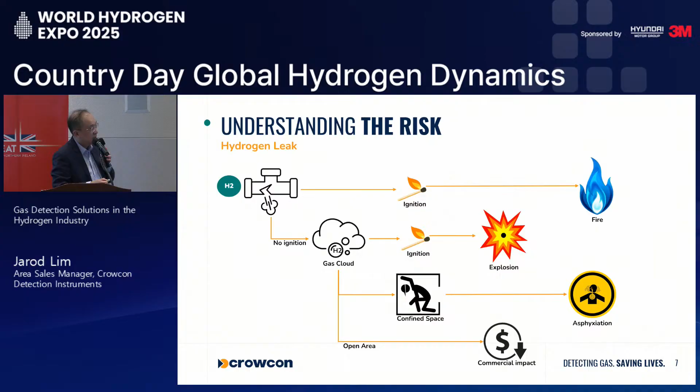So look at this ignition scenario - a typical gas hydrogen leak. In a typical situation like this, we have a hydrogen leakage. With ignition, you get a fire started. When there's no ignition and you have a gas cloud, that ignition will result in an explosion. In a confined space, as mentioned, you get asphyxiation, and in an open area with an explosion, you typically have unfortunate incidents where people have passed on and also destruction of property. So this is the kind of understanding of the risk that we face.

In terms of safety aspects, hydrogen is a light gas with less radiant heat, so you don't feel the heat unless you're close to it. And because there's no smoke, you need a lot of detection ready to be able to detect it. There's a lot of misconception about hydrogen being more dangerous, but actually different risks exist in gasoline, natural gas, or other fuels. If we are able to manage the safety aspects, we can actually have a successful adoption in this space.

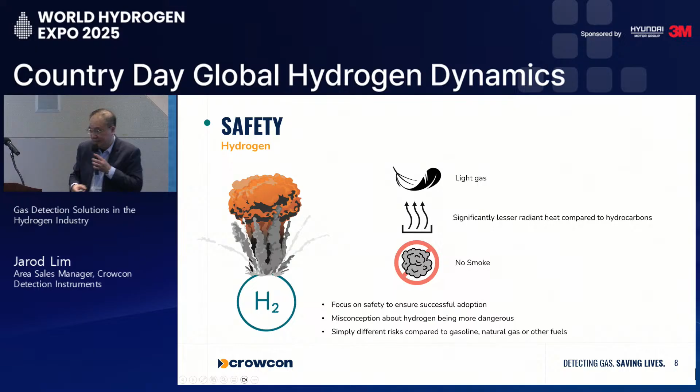This is a report from the Hydrogen Incidents and Accidents Database. You can see the space of reported incidents, with a high incidence of explosion at 56%, fire at 28%, unignited release at 13%, and near miss at only 3%. This tells you it's really a very dangerous situation, and you need to be wary.

In terms of reported causes, typically valve malfunction and leaking connections are the leading causes of hydrogen incidents. In 50% of these incidents, the report says that if staff were trained and educated better, they would be able to mitigate the risks. Corrective measures taken include better systems design and material selection.

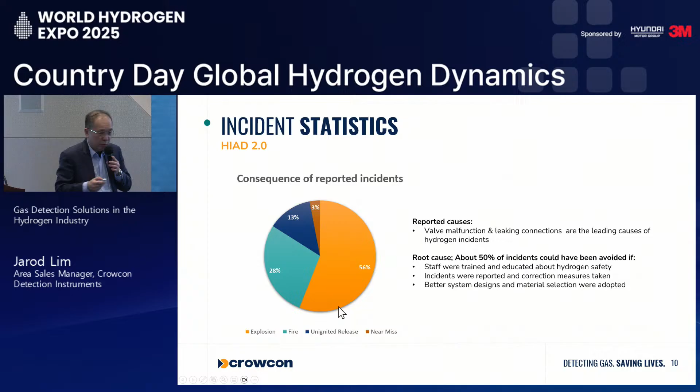So this is important as we go forward. There are safeguards that we have in place, and these are the broad scopes that we have. We'll go into the details about electrolyzers in a while.

If you look at hydrogen, there are two ways of doing it: prevention, so robust equipment design is very key, along with regular inspection and maintenance, and training and awareness of the staff.

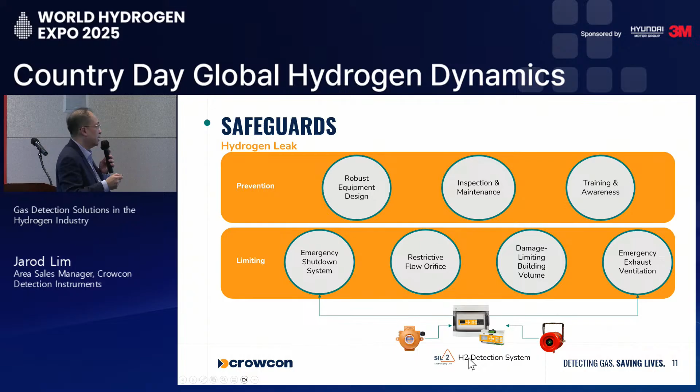In terms of limiting exposure, there's the emergency shutdown system, restrictive flow, damage limiting building volume, as well as emergency exhaust ventilation. I think other speakers will talk about this later. This typically comes under the H2 detection system, which I'll talk about in a short while.

In terms of detection technologies, these are the typical kinds of gas detectors deployed to mitigate risks in hydrogen. For personal protection, you have one you carry with your PPE, your personal protective equipment, which you put on your overalls, and this will detect hydrogen if it's within your vicinity. We also have fixed gas detectors and flame detectors able to detect hydrogen flames, and acoustic detectors for leaks from pressurized sources.

This is perhaps the key, which I'll talk about in a later slide: we can give a bespoke system so you can design it according to what you require, basically in the form of a gas sampling system that measures hydrogen concentration in process lines.

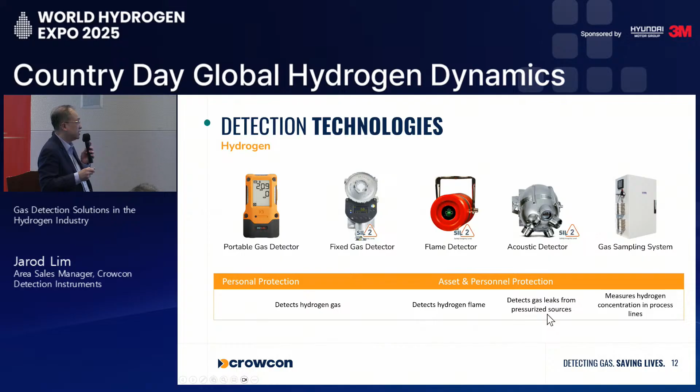Apart from the detectors you saw just now, within the detectors you have various kinds of sensing technology. I won't go through all of them, but these are the key sensing technologies deployed: catalytic, electrochemical, MOS, MEMS, thermal conductivity, and NDIR. But NDIR doesn't detect hydrogen. The rest have their own advantages and disadvantages.

So you need to understand your requirements, and we will work through with you in terms of what you need, then be able to advise which particular sensor goes into which sampling system.

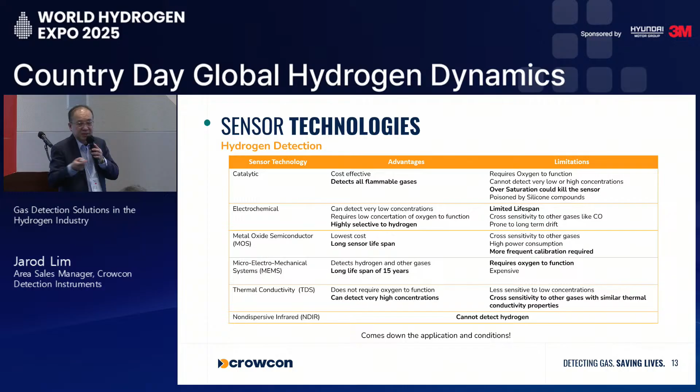In terms of applications, I think you've seen this around the exhibition, covering the whole hydrogen value chain. But we will focus in the next few slides on the electrolyzer and how we actually mitigate risk in this space, and show you some of the deployments we've done for storage and transportation applications.

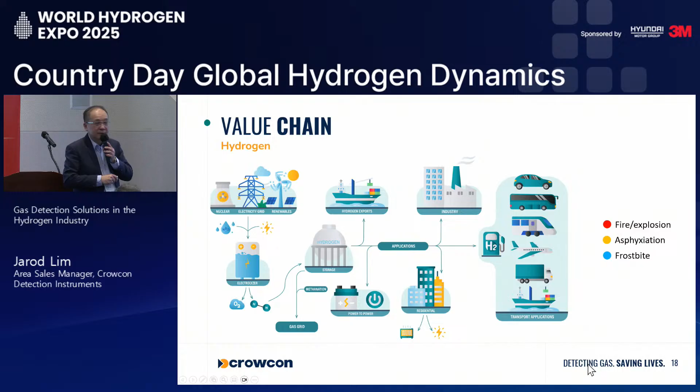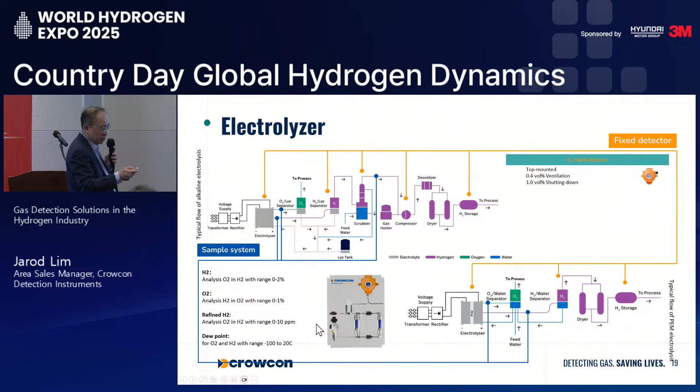So what happens here is that the sample analysis we just talked about, typically to detect H2 in O2, is installed at the oxygen outlet pipeline. Why do we do that? It's to detect whether hydrogen has leaked into the oxygen stream, and also to prevent the formation of explosive gas mixtures. Typically in the specs, we would use the electrochemical sensor or the thermal conductivity sensor, and these are able to detect at 1%, 2%, 4%, and also at volume 5,000 ppm.

And also for O2 in H2, in the earlier slide where you saw the electrolyzers, we installed it on the hydrogen outlet pipeline, downstream of the hydrogen purification units, to monitor the final product of hydrogen quality. We do this to detect whether oxygen has leaked into the hydrogen stream, for the safety and purity of the hydrogen, and also to prevent the formation of explosive gas mixtures. Here again, we deploy electrochemical sensors at a detection of 1%, 2%, and 4% volume.

And trace O2, this will be installed after hydrogen purification treatment, downstream of the hydrogen dryer and upstream of the storage tank or hydrogen processor. This is where I put it, at the final hydrogen outlet, to confirm the product purity. We do this to detect residual trace oxygen in hydrogen and to assess whether the membranes are actually damaged or aging. Once again, we deploy the electrochemical sensor at 0-10 or 100 ppm, parts per million.

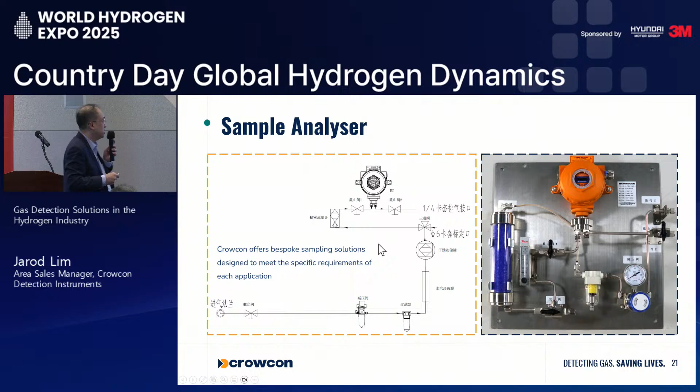This is a sample analyzer that we typically put inside the system. This is just one of the samples that we've done. We are able to design it according to your needs and also depending on what the requirements are. So do come and talk with us if you need to.

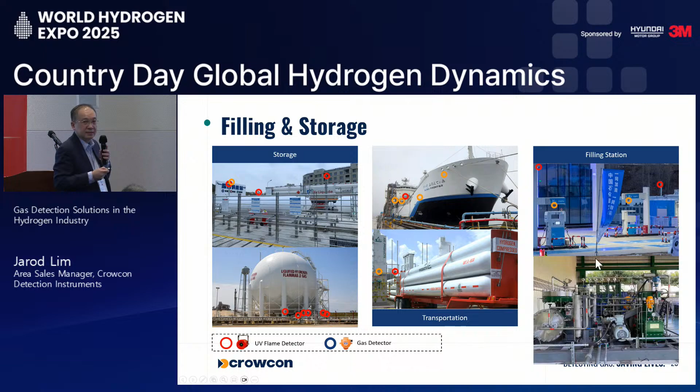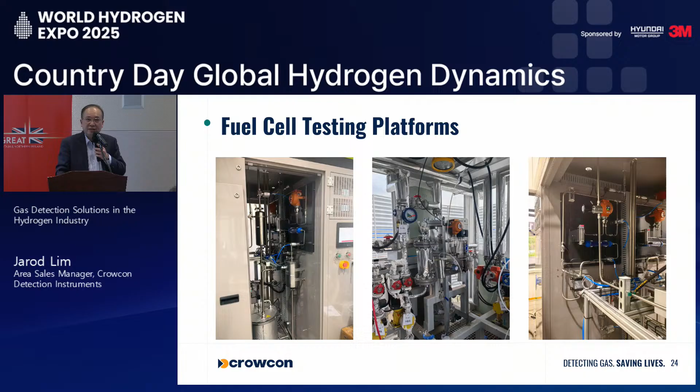Thank you, Jarod. Yeah, thank you.

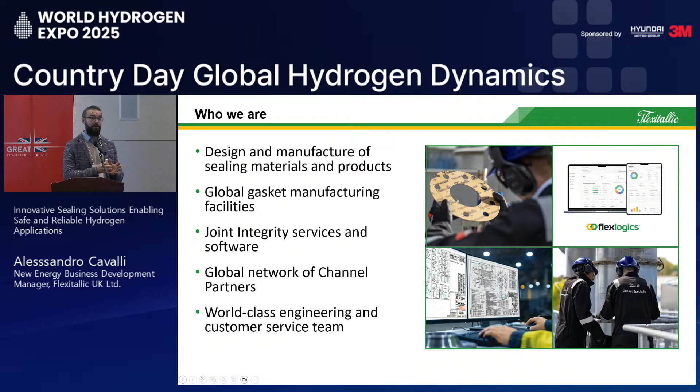Before entering into the topic, a couple of words about Flexitallic. For those not knowing the company, we are a leader in static sealing solutions - from engineering, development, design, and manufacturing of gaskets. We are present worldwide, both with our manufacturing and also distribution and channel partners all over the world. We make not only the gaskets and sealants that prevent leakage, but also software and services to make sure the flange connection is leak-free. So we look at the total joint integrity.

As you can imagine, since we work with gaskets and sealants, we work with several different industries. We have been working with hydrogen for a very long time, what we could call traditional hydrogen - produced and used in chemicals like ethylene, refineries for hydro treatment, and ammonia production plants. But it's now more than 20 years that we have also been working with what we could call new hydrogen technologies, for example fuel cells and electrolyzers, especially high temperature ones.

As a company, we are heavily focused on R&D and innovation, and we have the mission of making the world safer and cleaner. Since safety is paramount for our company, I would say we can start from this slide and look at safety when we talk about hydrogen.

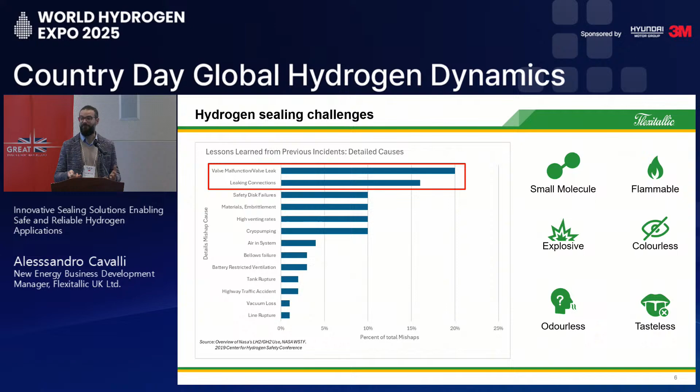The problem is that when working with hydrogen, it's a small molecule with a high tendency to leak easily from connections. And as we have seen before, if you have a leakage, the consequences can be quite severe because it's highly flammable and highly explosive. On top of this, it's difficult to detect simply by senses because it's colorless, odorless, tasteless - so we need to use devices to actually detect a leakage.

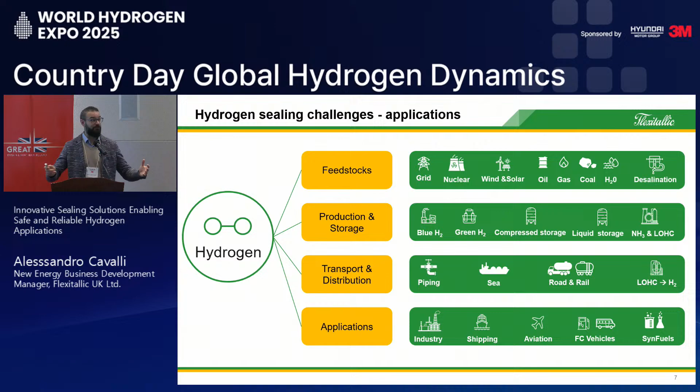I think what makes this even more difficult is that hydrogen is an energy vector, a chemical feedstock, so we are talking about several different applications from production, transport, storage, end use. It's really a world, the world of hydrogen, which means we have many different operating conditions in terms of temperature, from cryogenic, the lowest you can go, minus 253 Celsius, up to extremely high temperature, even 900 degrees Celsius. The same goes for pressure, from relatively low, nearly ambient for some types of electrolyzers, up to extremely high in hydrogen storage. On top of this, we also need to take into account all the other gases and liquids involved in the hydrogen sector, for example methane, ammonia, liquid hydrogen carriers, and also ultra-pure water or potassium hydroxide solutions used in low-temperature electrolyzers. So it's not easy to talk about leakages and gaskets in general, which is why I think it's better to focus on some use cases, such as high temperature and hydrogen piping.

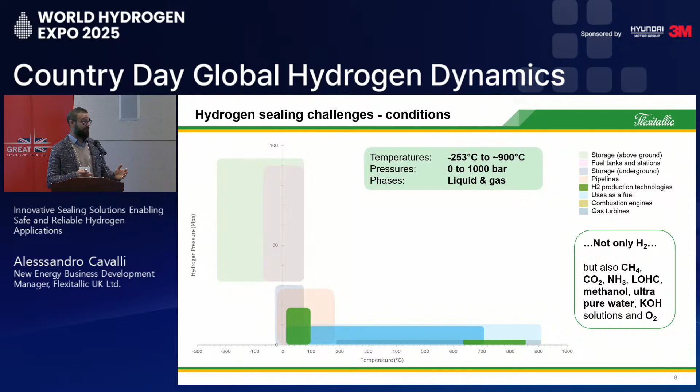Starting from high temperature hydrogen systems, here you can see various types. We can look at ceramic membranes for hydrogen production or filtration, catalytic pyrolysis for what is called turquoise hydrogen, or hydrogen from biomass gasification. These are all very high temperature processes, which is something common also to the traditional way of making hydrogen, steam methane reforming. So the challenge, obviously, is the high temperature.

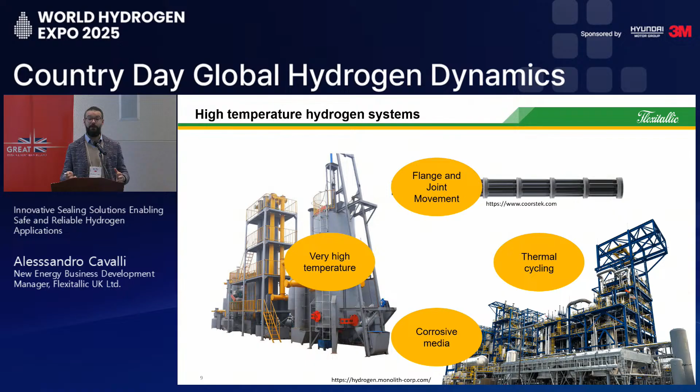It's not that easy to find materials that can withstand this operating condition for a long period of time. You need to keep in mind that at high temperature, things move, things relax. So if you have a flange connection, with thermal expansion your flange might not be stable, and there can be some relaxation of the metal, so the stress applied on the gasket might not be constant. Quite often there are also thermal cycles, so these systems do not continuously operate, but will be turned off and on again, and the temperature will fluctuate. Last, depending on the specific technology, there can be corrosive media involved, for example pyrolysis oil. Now, to address these challenges, Flexitallic developed a family of materials.

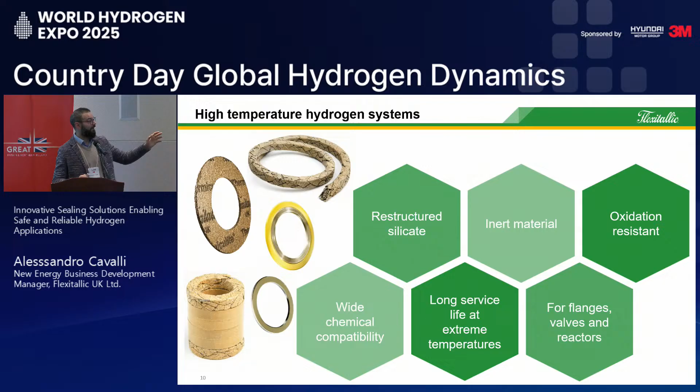This family of material is based on restructured silicate, which makes the material itself inert and resistant to oxidation. Different from other sealing materials like graphite, even above 350, 400, 450 degrees Celsius, the material does not undergo oxidation, meaning it remains stable over time. Also, because it's based on restructured silicate, the material is quite inert, so it's chemically compatible with a wide range of materials. Since there's no reaction going on, you can be sure that long term you have proper service conditions at high temperature. As I mentioned, it's a family of materials, so you can find it as a semi-metallic gasket, packing for valves, and different types of applications you might be working with.

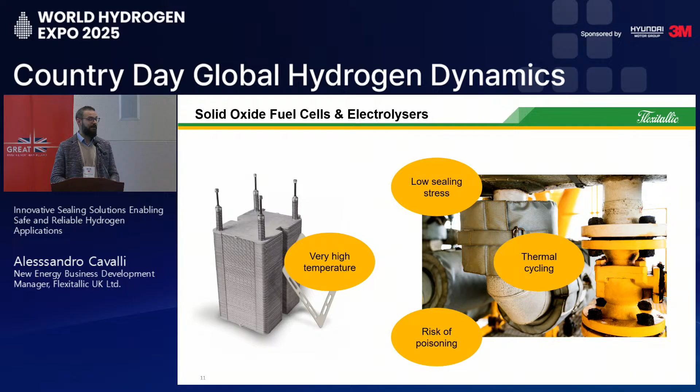Remaining in the world of high temperature applications, I would like to focus on solid oxide cells, because it's one of the technologies receiving more attention these days, partially because they are reversible. When you use them as a fuel cell, you can generate power from various fuels, and when you use them as an electrolyzer, you have the highest efficiency in generating hydrogen. Again, they are high temperature technologies, so it's not easy finding a material that can withstand this temperature for a long period of time. We are talking about a stack, so you have several layers of ceramic material, meaning you cannot apply a very high compressive stress. Also in this case you might have thermal cycles. Last, even though we are talking about high temperature and nickel catalyst, which is more resistant to impurities, there is still the risk of poisoning coming from the gasket itself.

Again, we have a solution for this. Basically, from the family of Thermiculite, we developed some specific grades for solid oxide cells. In this case, what you find in the material is only exfoliated vermiculite and steatite. There's no binder, so basically you are removing the risk of poisoning from the gasket itself.

We make it in various thicknesses, from 0.3 to 1 millimeter, which makes it suitable for application inside solid oxide cell stacks. And it's a highly compressible material, so it will be able to compensate for manufacturing tolerances of the other components in the stack.

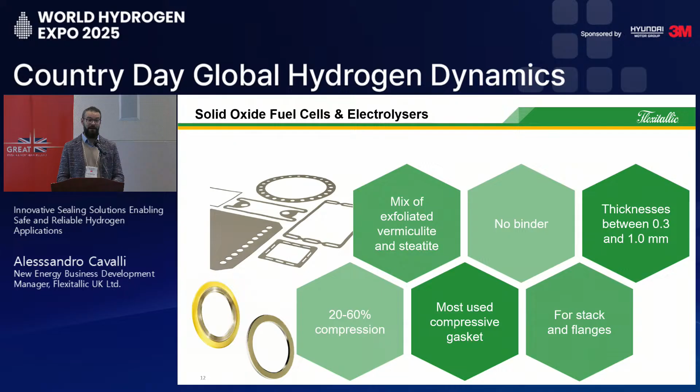At the moment, this is the most used compressive gasket in solid oxide environments, and this is because of these unique properties. It can be used in the stack, but also in the hot balance of plant of the system of this technology.

We change completely from high temperature, we go to ambient, and we have a look at hydrogen piping. Now, we said it before, it's a small molecule, which means that the gas can more easily escape. And as we said, it's flammable, which means that ideally you want to use a fire-resistant gasket.

Mentioned before, very broad pressure range. Imagine a pipe from an electrolyzer operating at just a few bars compared to a pipe that is transporting hydrogen at much higher pressure. And as you can see in the picture, there is the tendency or the desire to move these hydrogen plants close to shore or even offshore, where you have availability of renewable electricity and also of water.

These represent a risk of corrosion. So hydrogen itself is not corrosive for the gasket, but the moment you have this installation offshore or near shore, the salinity of the environment might cause corrosion in your connections.

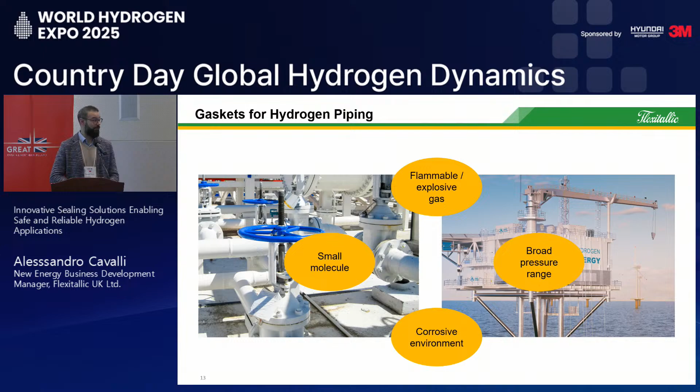Again, challenges, we created some solutions. In this case, we are talking about a material called vermiculite. This is the tightest sealing material you can find out there. So when you compare it with traditional type of sealing material, graphite, PTFE, vermiculite gives you better sealing performances.

It also is better, for example, than PTFE because it is fire safe. It is better than graphite because it prevents the galvanic corrosion you might find in environments like the one we've seen before.

It is also a material that you can consider future-proof in the sense that it does not contain any PFAS. You know that these days there is a lot of discussion on PTFE and PFAS bans, so this material does not contain anything of this. And it has a very broad operating condition, from cryogenic up to 260 degrees Celsius. Again, since it is used in different types of gaskets, it can be used for different pressure ranges.

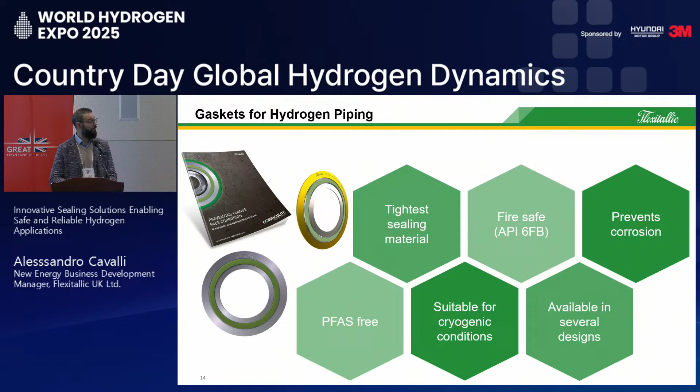We now look at the last part of this presentation, that is how to make sure that you are properly applying the right amount of stress on your gasket and overall in the whole stack.

As you might know, if you take an alkaline electrolyzer or a PEM electrolyzer, what is done today is you take a wrench and you just torque one by one the different tensioning rods. The problem is that when you are torquing, you are not sure about the compressive stress you are applying.

The other problem is that when you are torquing one rod, there is a crosstalk between that rod and the other. And since you are doing one by one, you are not ensuring that everything is going down in a parallel way.

There are solutions. So instead of using torquing, you can use tensioners. There are tensioners out there in the market, but the problem is that they are not designed for electrolyzer stacks. So the space that you have available between the different rods is not that much. You cannot fit standard tensioners.

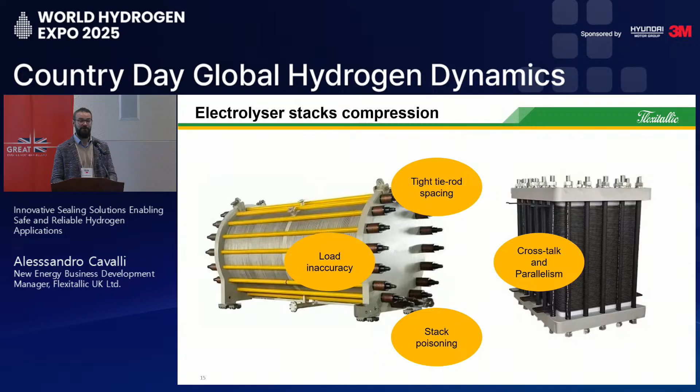These tensioners are really not designed for very long rods like the ones you find in electrolyzer stacks. And quite often they have some spillage of the oil used, and this is a risk for poisoning of the stack. Also in this case, we identified some challenges and we came up with solutions.

What you can see here, these are two systems that we developed for tensioning stacks. So we are moving from torquing to tensioning. In this way, we know exactly what is the stress that we are applying on the gasket, and we make sure that everything is being compressed in a parallel way.

At the same time, everything remains uniform. We know exactly what is the load applied, and as you can see in the two pictures, this is not something off the shelf that you buy. It's something that can be customized.

So the design is flexible, is the knowledge and the technology behind it, but then we usually discuss with customers how their stack looks like, and we can make it exactly based on their requirements. Not only in terms of the shape, the dimension of the tensioning system, but also in terms of how long the rods are or what are the important parameters for your assembly.

For example, when you are in high volume production of stacks, we can ensure that you're able to close your stack in just 5 minutes.

If you have a very big stack, we can make the system capable of compressing for more than 20 centimeters of your tensioning rod. Since this is specifically developed for electrolyzer stacks, we make sure there's no spillage of any oil used in the hydraulic tensioner, so you can even use it in clean rooms, which is quite often the case, especially with PEM electrolyzers.

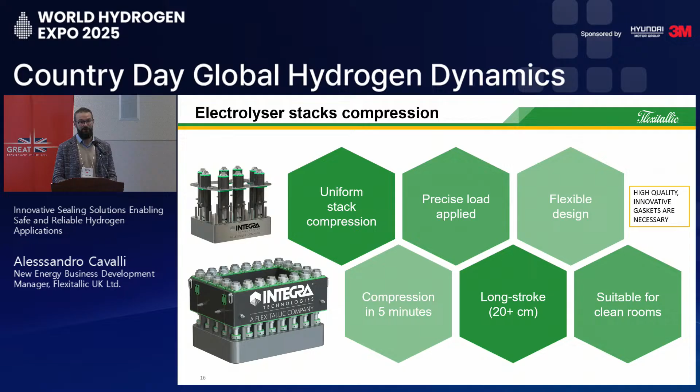I know that the presentation was very broad. I covered the challenges, high-temperature technologies, solid oxide, the piping, the tensioning, so many points were touched just on the surface. If you want to know more, or want to discuss your application, we are at the UK booth, 7C61, booth number 4. You're welcome to come and discuss your needs. Thank you.

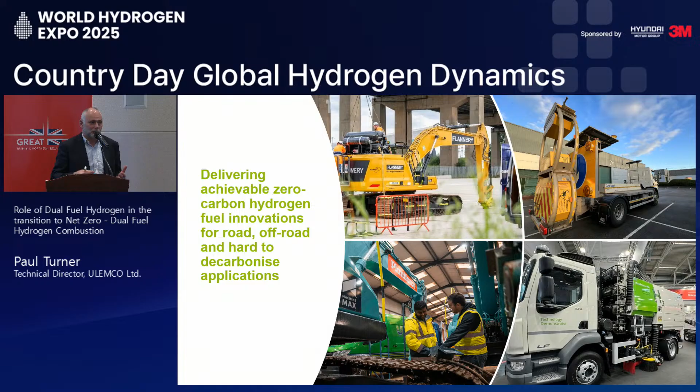ULEMCO is a company developing applications for hydrogen. We're looking at the transport industry, the off-highway sectors, utility vehicles, and vehicles operating in specialist areas like airports. We started in 2014, spinning out of a company called Revolve Technologies, which later became CMB Tech.

We started off with a hydrogen dual fuel technology, which we've been applying and are still applying regularly to customers. Whilst going through that transition, we've been developing fuel cell technologies and hydrogen IC engines in hybrid configurations to support some applications. Once we got some of these applications in the field, we found there's a big hole in the marketplace for getting hydrogen to vehicles.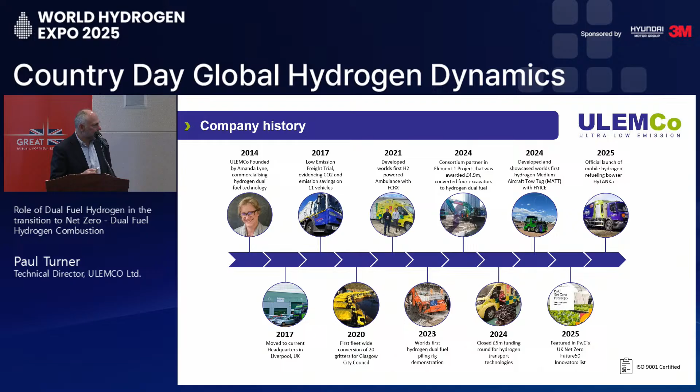So we've developed a hydrogen bowser, which actually takes hydrogen to vehicles operating off-highway. We sit in the hydrogen value chain as a system integrator, providing our customers with various hydrogen applications in the transport sector and a little on refueling. We don't get involved in electrolysis, in the production of hydrogen, or in the general distribution of hydrogen.

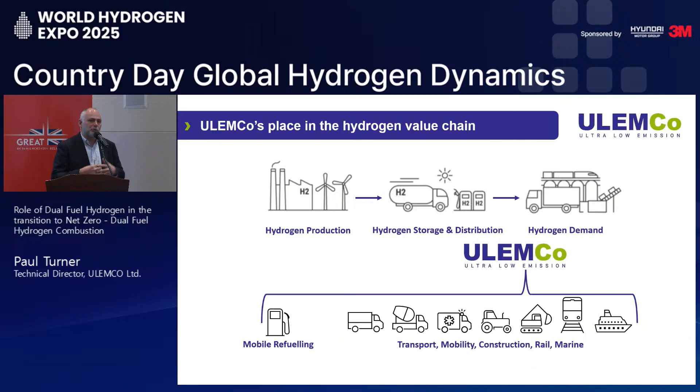We're a very experienced company with great experience in finding out what our customers' requirements are and providing solutions that suit that customer. We are well up to date with all the different standards and regulations for hydrogen transport in various guises, whether maritime, off-highway, or on-highway. We have economic models covering how you're going to get a return on your investment. Some of that is quite challenging these days with hydrogen pricing, but it depends on your marketing and your need to decarbonize.

Within the European field, we are up to date with all the hydrogen supply, where we can get hydrogen from, and we can support our customers in actually buying the hydrogen. We have some patented software which allows us to do gas detection systems using different types of pressure balances and monitoring of hydrogen on board the vehicle. We do it all by pressure difference.

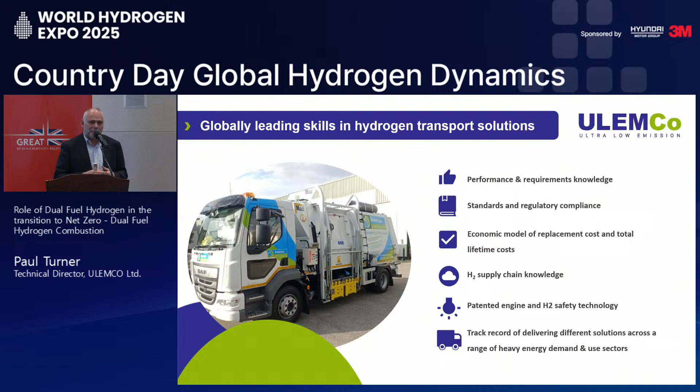And we have a track record of delivering applications for our customers successfully. This is just a range of some of the things which we've been doing for our customers.

We've got the hydrogen dual fuel technology, which is our core technology. We've been developing fuel cell range extenders, which allow us to plug and play into electric vehicles. So if you have an electric vehicle which isn't doing the job you need it to do, because it doesn't have the range or the power on board, we can add a hydrogen fuel cell and all the associated storage systems to your vehicle. This is showing a small one, but I'll show it a bit further later on. We are working with various fuel cell providers, including Hydrogenics and Toyota.

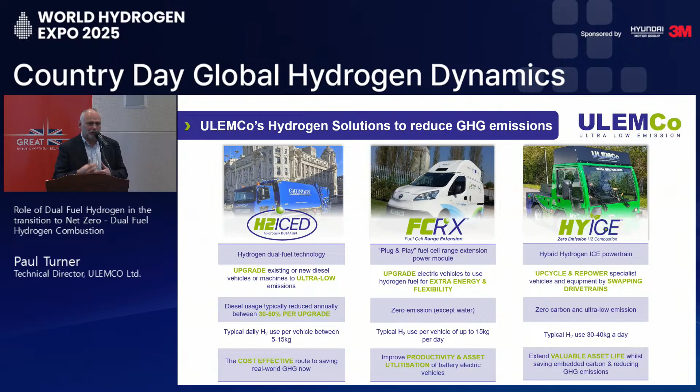And we developed a hydrogen IC engine as a low-cost application for hydrogen systems. It's a hybrid system, so we use some of the advantages of the hybridization to allow us to avoid some of the NOx issues, so we can run these engines with zero emissions. But I'll come on to some of those and show you some of those applications as I go forward.

But the one thing I really want to talk about is the transition to zero, and why I believe we have to transition. We can't just do it in one big step, so one day we're all diesel, and next day we're all hydrogen or zero emissions. And we get a lot of pushback saying, why isn't your technology completely zero emissions? And I often have to say to people, don't let best be the enemy of being better.

So we have a scenario I think we're all aware of, the chicken and the egg. If I've got a hydrogen refueling station and I've got no vehicles to come to it, the station doesn't open, doesn't stay there for long, it gets closed. If I go and buy some vehicles and I've got nowhere to refuel them, I can't use them, they get parked. They become redundant assets, waste of space, paperweights.

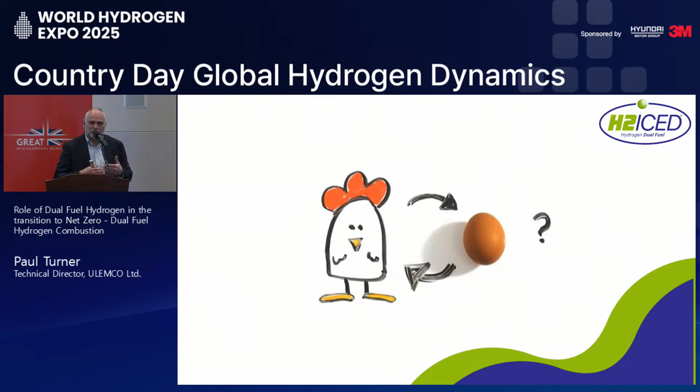So we need to find something which allows us to use hydrogen when hydrogen is available, encourage the deployment of stations, and if hydrogen isn't available, the vehicle, the asset, can still do its job on the traditional fuel, whether it be petrol or diesel or CNG. So we need to be able to allow ourselves to transition to zero emissions.

And we've been doing that using hydrogen dual fuel. So we have an entry standard for hydrogen dual fuel. This standard allows us to put hydrogen onto a vehicle, and typically that gives us something between 30 and 40% reduction in CO2 on that vehicle over its daily duty cycle. Peaks can be up to 95%, minimums can be almost at 0%, but its average is about 30 to 40%.

And this allows companies to get to know what hydrogen is, explore what they're doing with it, learn how to refuel vehicles, learn how to deploy it, get their operators comfortable with hydrogen, get their drivers comfortable with hydrogen, get their maintenance teams comfortable with hydrogen.

And then we've been working with some OEMs, and some of our competitors have been working with the OEMs to develop OEM-based hydrogen dual fuel solutions. And here they get an average of around 60 to 70% of their energy from hydrogen.

And a notable one of that is CMB.TECH with their cooperation with MAN and Volvo Penta. With MAN engines, they've got some big V12, 24-litre engines running in their Windcats, and they're getting between 60 and 70% utilisation of the hydrogen, but displacing diesel.

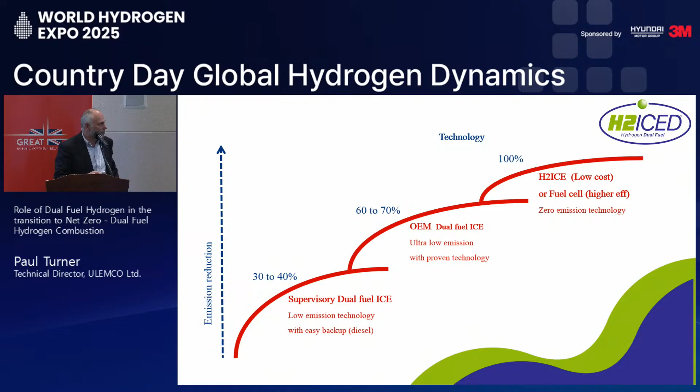Another thing I keep noting is your vehicle just isn't zero emissions with this approach, it's not saving enough CO2, but there's a cost as well. Fuel cell electric trucks, for instance, are very expensive pieces of kit. All the power electronics, all the traction motors, the batteries, the hydrogen system, the hydrogen fuel cell, all adds up to give you a very expensive application.

For the price of 3 fuel cell trucks, I can do over 40 dual fuel trucks. I can save 450 tons of CO2 compared to about 90 for the same value of money, whatever currency you want to use. So I can do a lot more CO2 saving with my 30 to 40% reduction than you can with a 100% saving on a hydrogen fuel cell vehicle. The balance isn't quite the same if you've got a hydrogen ICE, but most people are trying to jump into that hydrogen fuel cell sector. So we can do a lot of savings by going dual fuel and getting the transition working.

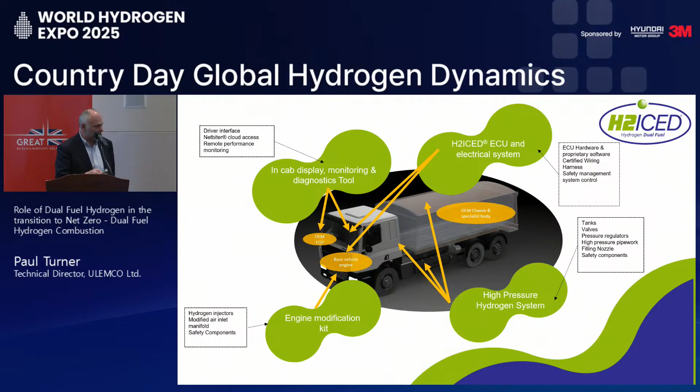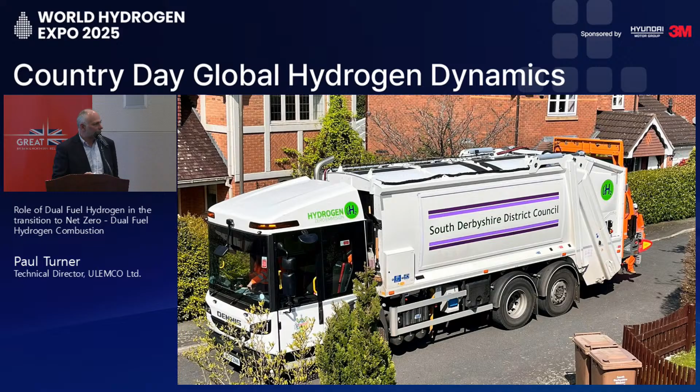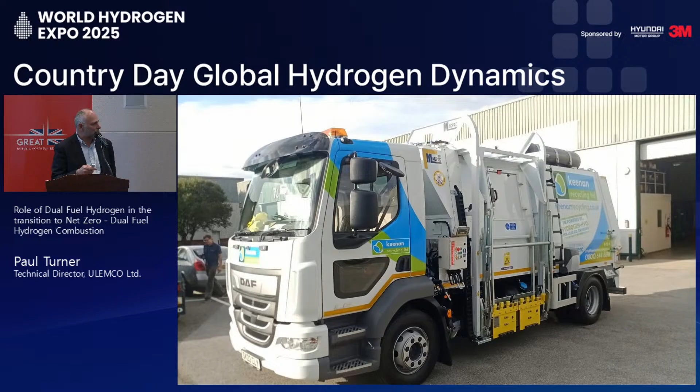That's another waste disposal vehicle. This is a food waste collection vehicle running on hydrogen, with the tank up on the roof. Smaller vehicles as well - this is a Ford Ranger converted to run on hydrogen dual fuel. Here's a water tanker running on hydrogen dual fuel. Even tractors - this is a Massey Ferguson tractor, but we've also done some Case New Holland tractors. There's about 10 of those operating in Holland at the moment.

More recently, we've been working with off-highway construction equipment to convert 360-degree excavators, 40-ton dump trucks, piling rigs, and heavy load vehicles, and these are running hydrogen dual fuel, getting around a 30% reduction in CO2.

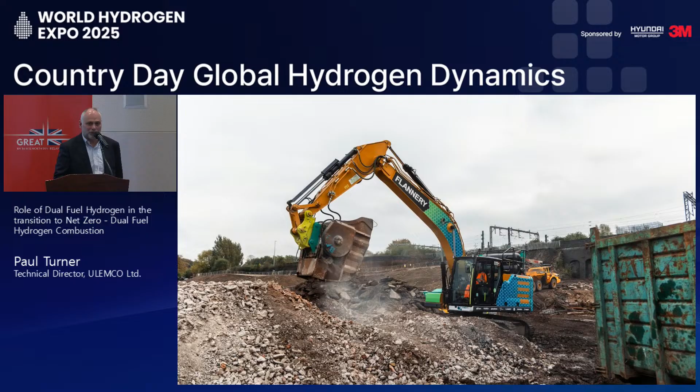Here's one of the vehicles actually really doing some heavy work. As you can see, there's a lot of load there. We've tried fuel cells in these things, but it really doesn't work - they use too much energy.

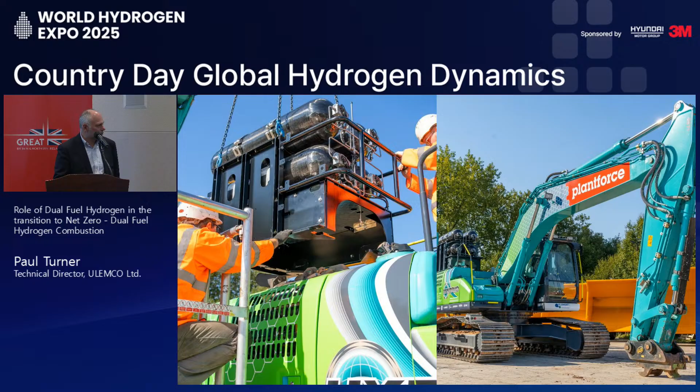To support those off-highway machines, they can't drive to a refueling station. So we developed a Bowser for one of our clients, and we're actually doing these for some other people now. These are taking the hydrogen to the excavators on the site. This is a four-wheel drive truck which has got hydrogen storage on it and a compressor to compress it up so we can get maximum transfer pressure, and they can refuel vehicles to 350 bar in about 4 to 5 minutes of turning up to the vehicle.

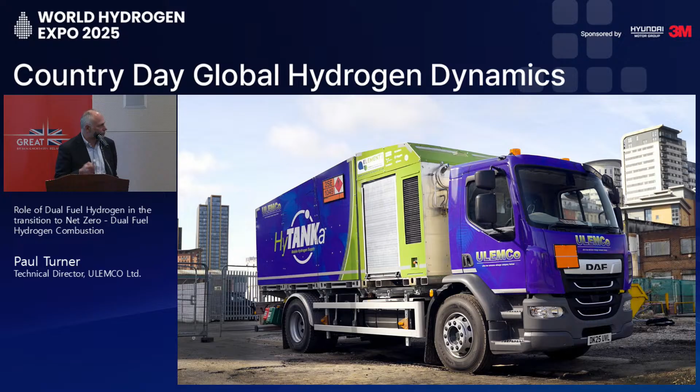This is another refueling system we have, and this allows us to take small quantities of hydrogen around to different applications. We typically use this for when we're doing a setup or a calibration of a vehicle. And the other things we are doing to make sure we're ready for once we get a good infrastructure in place is to develop the fuel cell range extender and the hydrogen ICE.

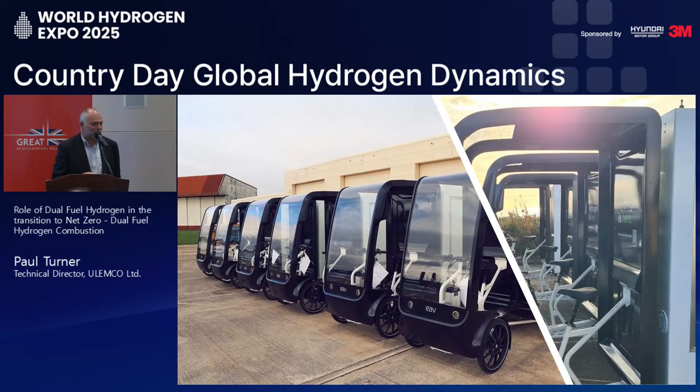There it goes. Another application here is the fuel cell. This is a bicycle fuel cell. This is an ambulance with a fuel cell. We're developing this now with the Toyota Mirai fuel cell.

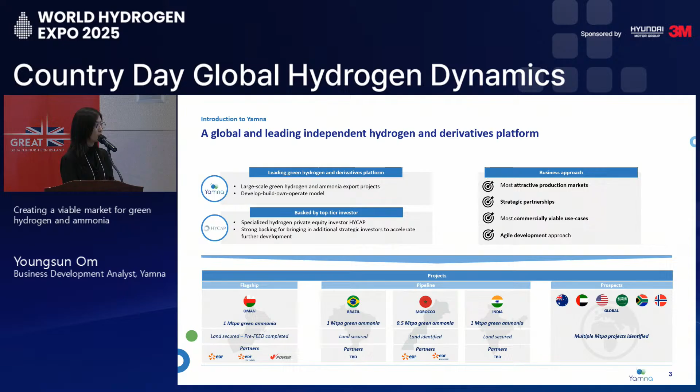Yamna is backed by a UK private equity fund called HYCAP. HYCAP is a fund specialized in hydrogen, and they invest across the entire value chain of hydrogen, from production to delivery and uses. Their cornerstone investor is JCB, the global construction machinery manufacturer, who is also a potential consumer of hydrogen.

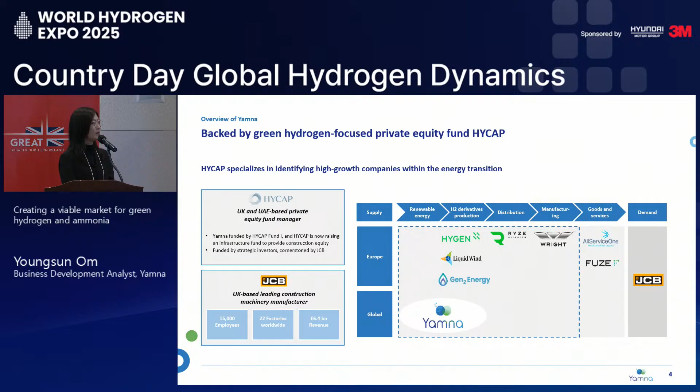Our most advanced project is in Oman, Salalah, where we are developing a 1 million ton green ammonia project together with our development partners EDF and J-Power. Currently the targeted COD is 2030.

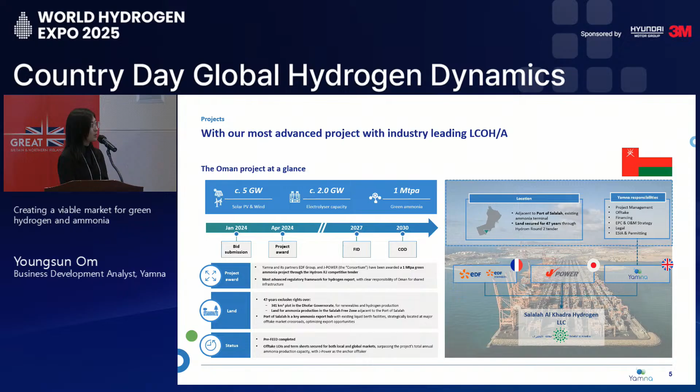So now that I've explained a bit about what Yamna is and what we are doing, I want to open a discussion on what we need in order to create a viable green hydrogen and ammonia market.

There has been a lot of bad news recently where projects have been delayed or canceled, and there are delays in regulation implementation. Of course, in Korea, there was the suspension of the CHPS auction. So not so good news around.

However, we still believe there is a market, because first of all, the transition to net zero emissions and decarbonization cannot happen without hydrogen used in the hard-to-abate sectors. We've been talking to different customers in different sectors, such as steel, refineries, fertilizers, and shipping, and all of them have said they have a plan to use hydrogen, and they are prepping themselves to use hydrogen when it comes to the right time with the right pricing.

So we believe that there is enough demand, and also on the supply side, there have been a lot of projects announced in the past few years. I think the IEA published that there are over 2,000 projects announced around the world. Of course, not all these projects will materialize, but it shows that there is a sufficient supply pool ready. So it's all about the timing and the size of the market when it all comes together.

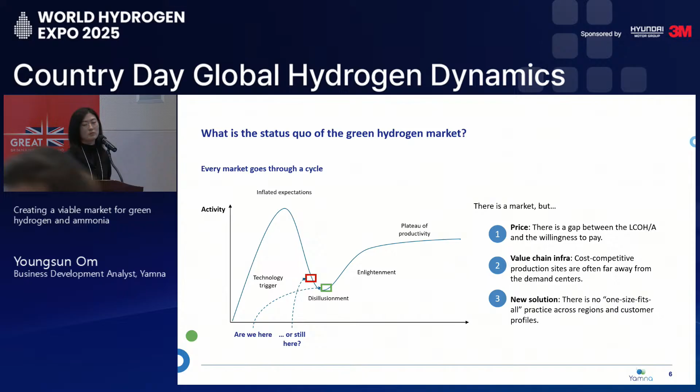So there needs to be a seamless delivery from the production site to the customer site. This needs the appropriate export-import infrastructure, pipelines, shipping, and all of these coming together at the same time. Last but not least, new solutions for offtakes, because not all offtakers are asking for the same thing. You need fit-for-purpose solutions for each market, regulation, and sector. So it's really important to understand what the specific need of each customer is and to tailor our approach accordingly.

I think there needs to be four pieces that need to come together in order for this hydrogen market to work. First is the knowledge on regulations - what exactly the targets are, what applications are going to be used or demanding the molecules, and so on.

The second piece is the relationships - actually talking to the off-takers or traders who are going to be buying your molecules. And of course, there's the commercial and technical parts where you need to optimize your strategies based on the knowledge and the relationship that you have built.

So based on those verified outcomes or strategies, you need to fit your commercial risk allocations or technical sizing of your storage or vessel size and so on, in order to tailor to those findings in the market. So maybe it's easier to give you an example of how these four pieces work together as a development engine.

I've been mainly working on the Korean market, especially the CHPS auction, where I've been talking to the power generation companies and the traders to participate in this year's CHPS auction. To begin with, at Yamna, we already knew there was going to be a clean hydrogen power generation auction in Korea.

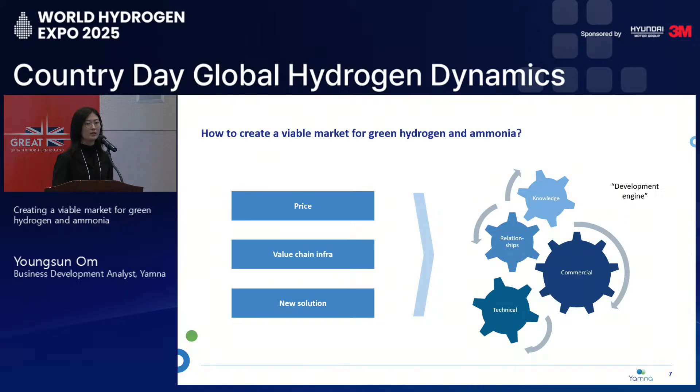These are the main markets that Yamna is currently focusing on, not only in South Korea, but also in Japan. There is a clean hydrogen power auction called LTDA, and also a CFD scheme, which is more focused on hard-to-abate sectors. We are also looking into the European market, where we are in active discussion with different customers in different sectors, such as steel and trading.

And also in the global scene, there is shipping, where the IMO has been delayed for another year. However, we do see a market in the bunkering side as well.

So we continue to monitor these global hydrogen and ammonia markets, so that we can deliver our cost-competitive molecules to the needed customers in a timely manner.

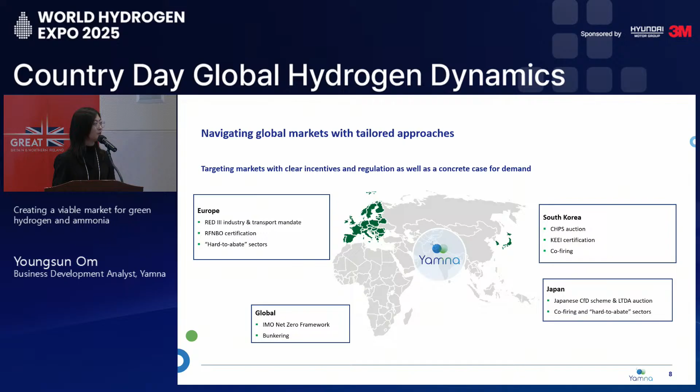That's it for today. Thank you for listening.